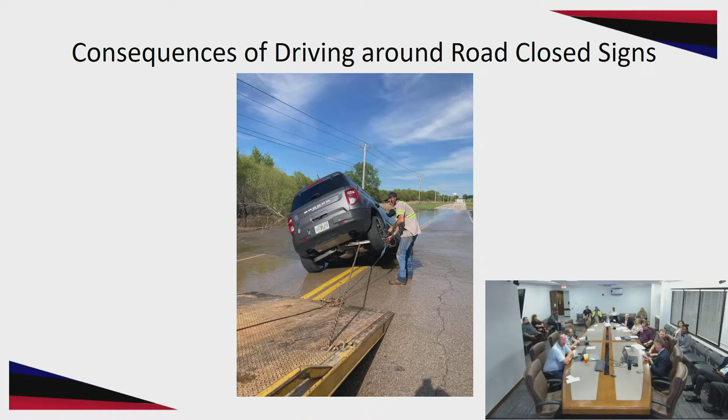The average rainfall for the month of April was 3.64 inches over 30 years. This year in April, we had 14.06 inches, almost 5 times that amount of rain. You can imagine what that does.

We all know it's been kind of a wet season, so things were already in a rough situation. The main storm event we were really watching was April 19th through April 30th. That's when we saw the most flooding and the most damage being done.

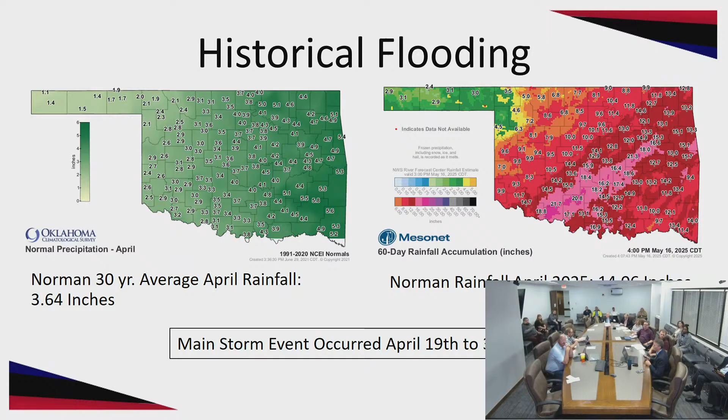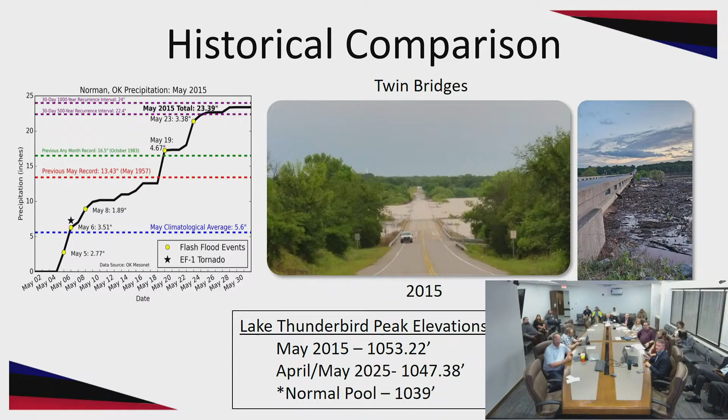Scott, is that debris from the tree field just to the north of the bridge? That is north of the bridge, so that would have been stuff washing down the little river through that area and collecting along the bridge because it couldn't flow under. I'm gonna say if I have a boat on Thunderbird, I may not want it out right now. There's logs floating under the water.

You mentioned about discharging. The city of Norman is not in charge of discharging that water. That's correct. The Army Corps of Engineers, and of course the lake is under control of the Bureau of Reclamation, they control all those discharges, so that's not something we have any control over. We do recognize the folks at COMCD, they usually get a hold of Mr. Mattingly and his team and say, hey, you can drink all the water you want out of Lake Thunderbird for free to help get down below that overflow yield. So we turn off the well field and try to drink as much of that Lake Thunderbird water as we can when it's available, just do what we can. Yeah, so we do what we can, we do our part.

Another thing I'd like to mention is that a vehicle can float in 10 inches of water. So if you're driving in 10 inches of water, there's a chance you can float. If there's moving water, you can be washed off the roadway. You didn't just have a Bronco to test it out? We were only about 7 inches, I think, at that point.

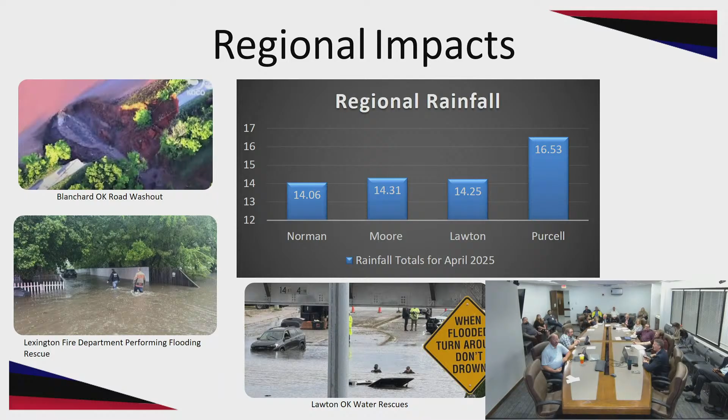I also want to take a moment to recognize the effort it takes when storms hit like this. I'm not going to spend a lot of time here, but we had a lot of different departments involved. City Clerk's office and our action center were inundated with calls and doing their best to keep up. I think there were extra people answering phones to get things where they needed to be to help our citizens. Fire and police, you can see in the photo, were both there on location taking care of our citizens, helping us watch for places where road closures needed to occur and watching out for public safety. Of course, our emergency management group was working hard this entire time.

Public Works were out there looking at road closures and items that were happening - were roads safe, could we reopen them. Utilities had line breaks, and I know they probably had some excess water coming into the water reclamation facility, which meant they had to do some extra operations to make that work. The city manager's office, we had our communications group - Tiffany was amazing in helping get information out to our public repeatedly. And parks, like we showed previously, there were parks that were flooded. They had to make sure they were safe to open back up to people, making sure there wasn't damage occurring and helping us watch the flooding issues.

So when we have these events, it's not one group or a small group - it takes a lot of our resources and a lot of effort. I appreciate each one of these groups and what they did to help during this event.

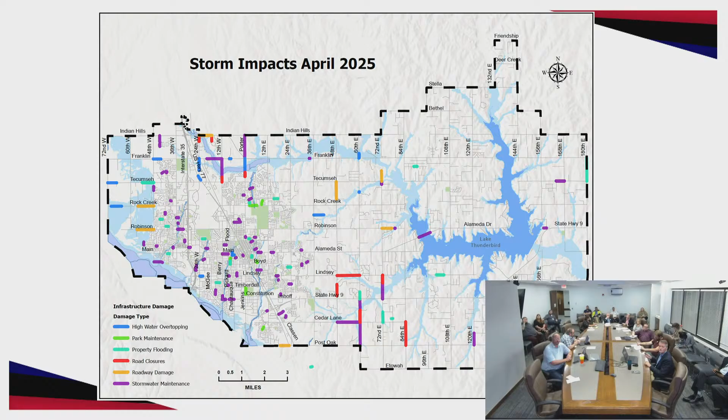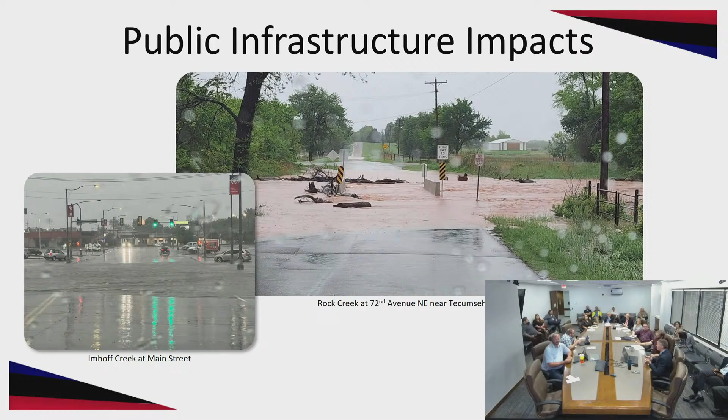When we start looking at what we were impacted by, we had a lot of public infrastructure impacts. That smaller picture is Imhoff Creek at Main Street, which we see go under quite a bit - this isn't something we're unaccustomed to, unfortunately. The second one is Rock Creek at 72nd Avenue in the area around Tecumseh. You can see the bridge is flooded, there's water across it, and you can tell water's moving - this is another place where we had swift water movement. You can see debris all the way across the roadway. These are just a couple of pictures, but this was noticeable all over town. You're gonna see more pictures as we go through this.

So there's a lot of impacts throughout all of Norman.

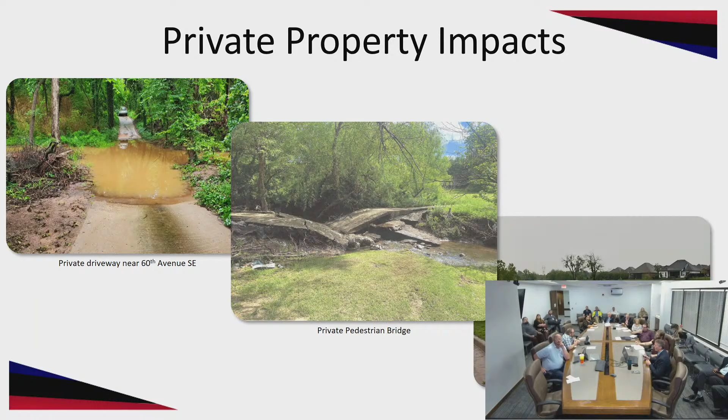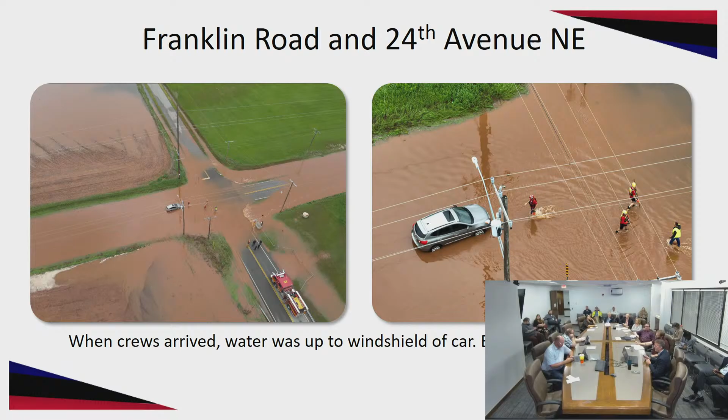10 Mile Flats was heavily impacted - these are just some photos. I live kind of in this area, a little up the hill on Tecumseh, so my first thing I do is drive down to 10 Mile Flats, drive around to Main Street, and check some of those locations. This was basically pretty close to what I saw. You can see that large picture, a very large area inundated. There are still areas prior to this that were inundated and are still continuing to drain, which we're having trouble with.

Just some more photos - I don't know how deep the water is that the car is going through, I can't even see the road. I don't know if I would have wanted to be driving down the middle of that, but they obviously were. And you can see another photo there of just the extent of the rain and flooding we saw in that area.

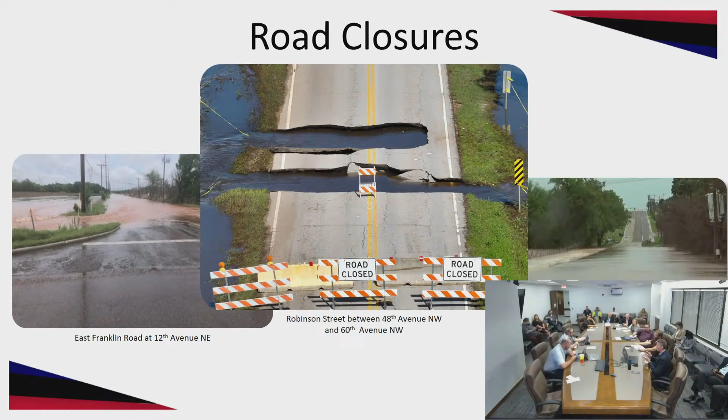I've seen it get 2 feet deep here in the past. I don't know what our actual elevations were here, but it floods for about a quarter mile. So this is another location we always know to check and get road closed signs up, because that's another location where motorists can get stranded.

Structures - we didn't have quite as many structures as we've had in past events. We had 29 reports of personal property flooded or damaged. 24 were related to flooding on the property or washed-out, inaccessible driveways. Most of those you'd expect to be in East Norman, where there's a lot of bar ditches, and those events can wash out driveways and culverts, so there's a lot of damage in that area. Five flooded structures, including garages, sheds, and patios.

The interesting thing is none of the locations where we had reports of flooding were in a floodplain - they were all outside of floodplains. But to build on that, they were all areas that we're aware of. There was nothing new; we didn't really have a new report of an area.

Now, there are areas that were flooded and people that were flooded that may not be reported here, so we may not have all the reporting. A lot of people don't really want to report, or it hasn't made it to us or to the state.

We did check our areas of repetitive loss, meaning structures that have been flooded repeatedly over time and have made claims - that's someplace we want to be more aware of. None of the structures were in those areas. Like I said, they were all in areas that we expected to find flooding.

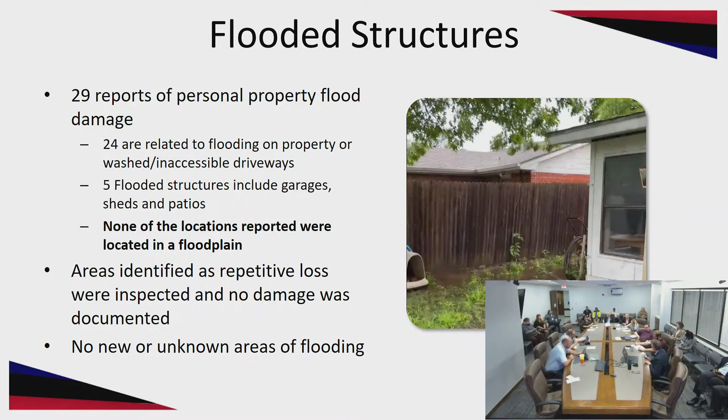How'd the vineyard do? There was no flooding reported in that area. Good job. They made it halfway up Bill's driveway, did it? But that's about it - halfway. Nothing came in the house.

In 2015, my standard line was, somebody would call and say, 'We're flooded.' My immediate response was, 'I'm so sorry - how much water got into your living room?' 'Well, none.' 'Did it come in the hallway?' 'No.' 'Did it get in your garage?' 'No.' 'So you have ponding water in your yard.' Because we were having so many flooding complaints, we had to start breaking it down by whether you're personally impacted with your personal property or just your yard.

So some of the reasons why we're having flooding problems in Norman - I think that bears some brief discussion. In a lot of areas, especially in core Norman, it's a lack of infrastructure, or it's undersized.

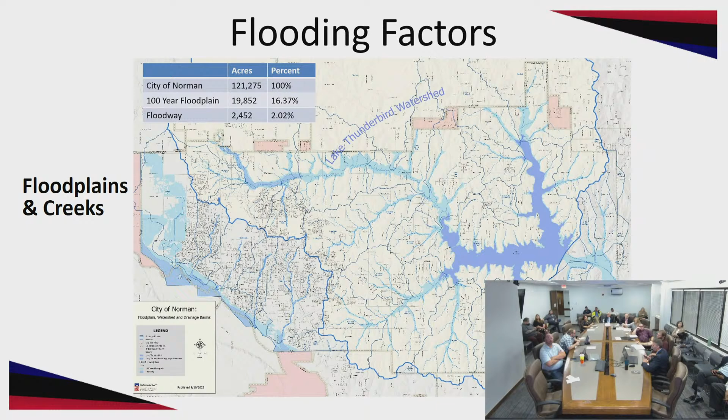I do want to point out that since the 2015 floods, we've done work that's actually come through and helped with flooding issues in Norman. So we're not sitting still, we're always moving forward.

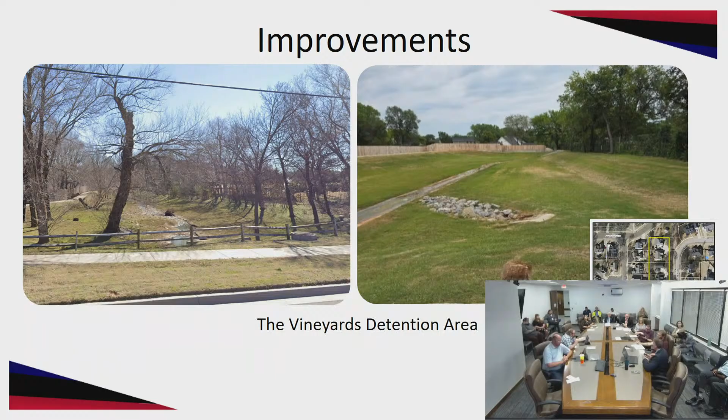This area was done because there were homes in the area that were repetitive loss homes, so it was made a high priority to be able to get those out of that repetitive loss category.

Main Street Bridge over Brookhaven Creek. This is the bridge that we started work on a Monday or Tuesday, and then Tuesday night, the bridge collapsed because of the rain event that we had that night. So it was very lucky that we were already under construction. We didn't have to go get a firm, but it completely failed.

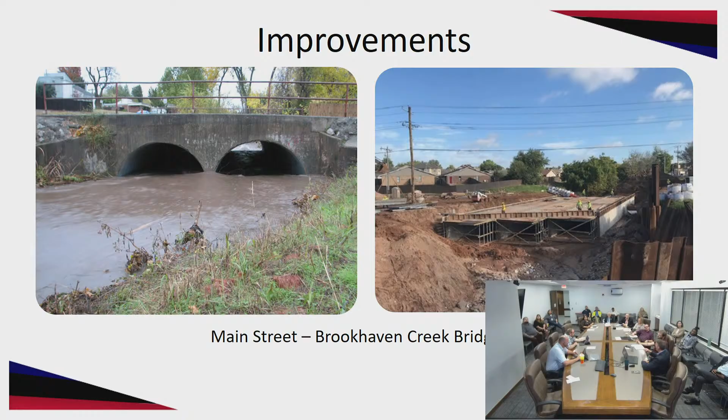Would you say that before the project that Lindsey Street and McGee would have to be closed once or twice or a couple times a year? It would just depend on the year, but yes. As soon as it started raining, somebody mobilized that location to see if we needed to close it.

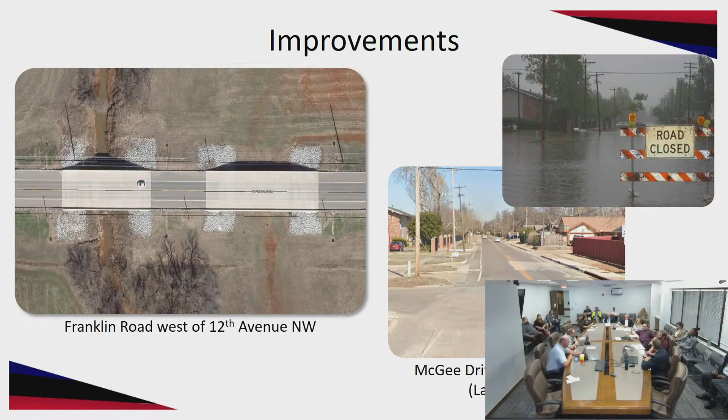Sounds like a surgeon leaving a tool inside. It's about that bad. But other than that, it was one of those times where we were absolutely having a meltdown, and we go, 'Huh, hey, it looks...' But no, we have not had any flooding at this location since. I guarantee it, we go down there every Sunday. And it's wonderful. Yeah, it works really well.

This location is also on that same project. This is the bridge over Imhoff Creek on Lindsay. My favorite bridge in Norman is the one that's got the cool columns. The upper picture is actually what it looked like before. You can see there's not much there. It used to overtop the road. It was a pretty bad situation. That picture in the middle is what the structure underneath looks like.

It's called a Conspan, and that is what is underneath there. The picture on the right is the bridge structure after it's complete, during a very high rain event. You can see how much water was flowing through there, but it opens it up and lets a lot more water flow through. We haven't had any flooding at this location, although it shows that in a 100-year storm, it is possible to get some minor overtopping. We just couldn't get it high enough without causing other problems to completely solve it.

And the word you use is contact? Contech. Contech. That's the brand. Oh, okay, gotcha. And it's called a Conspan, that's their proprietary name. If you've been to the Gathering Place, when you go underneath the land bridges on Riverside Drive, I think it's the same product or a very similar product. So you can use it to build bridge structures very efficiently.

So the picture in the middle, were there multiple of those? They're all connected? The width of the bridge, and they connect together, and they're sealed up together, and then there's concrete around that. Yeah, it was unique, it was the first time we'd used it. It can be costly. A lot of times we can do a box structure cheaper, so we haven't gone to this a lot. But it's something we always have in our pocket if we need to look at it for future designs.

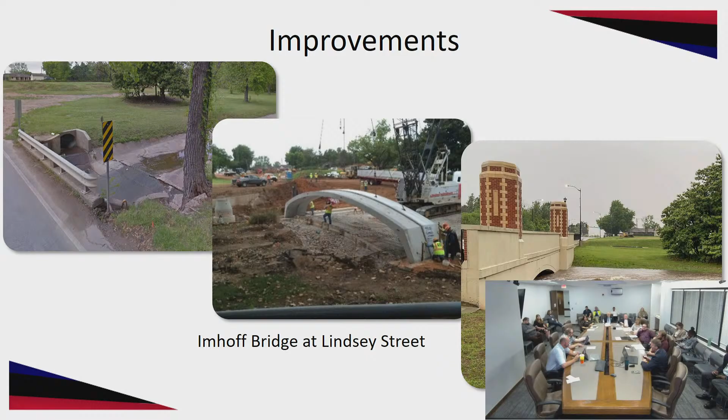And our plan is, we also bought 214 Lahoma, so 2 with the house in the middle now. The plan is to go back in there and do some natural plantings that make it more like a rain garden where they can help soak the water up. This also allows a little bit more water storage area. If we could buy more, we could probably go in there and do some kind of detention in this area if possible. We just don't have enough space to do something like that.

We've also bought several properties. We bought 2 since I've been here on the south side of the Main Street roundabout. And then a little further south, prior to my coming here, 4, 6, 8, I can't remember the number of homes further south that were repetitive loss that we bought that are now clear fields too. Not something we do a lot of, but it's a great way to impact our stormwater. I just want to point out that we bring that to council, and council's assistance in allowing us to do that is making an impact on our flooding in Norman.

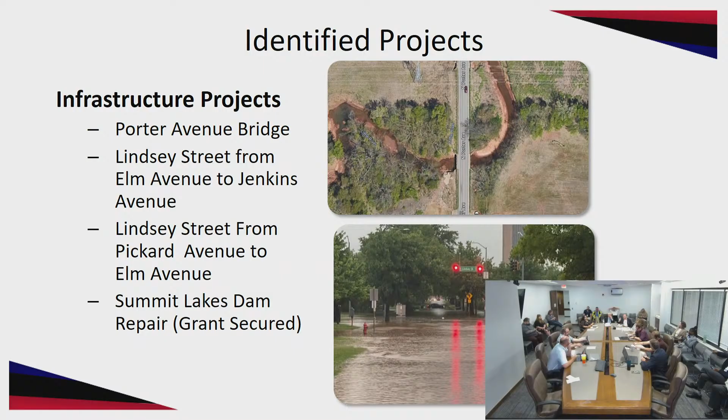When it collapsed, it wound up clogging the creek. They got in there and removed it real quick — we got alerted to that and granted them emergency authorization to clear it so it didn't impede flow. They've already come back, and we issued a floodplain permit yesterday for them to rebuild this pedestrian bridge, because it connects a small community to their pool, which they're not able to access right now.

So again, deferred maintenance becomes a concern. And that's one place your question earlier is, could we take it over? That's hard for me to say we want to take over that liability. Do we need to bring it up to code and then we'll take it over? But obviously we need to assist in that in some way. I don't have the answers to that. I think that's something we're going to put a lot of time and consideration into about how we move forward in that type of scenario.

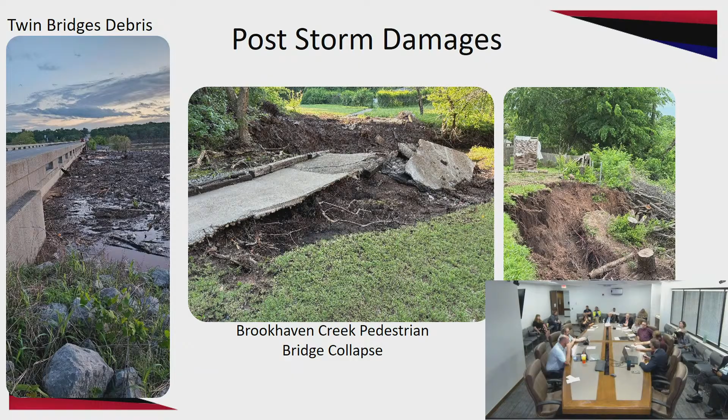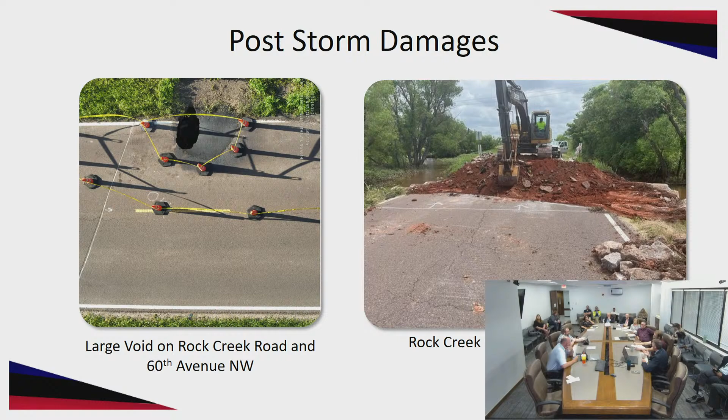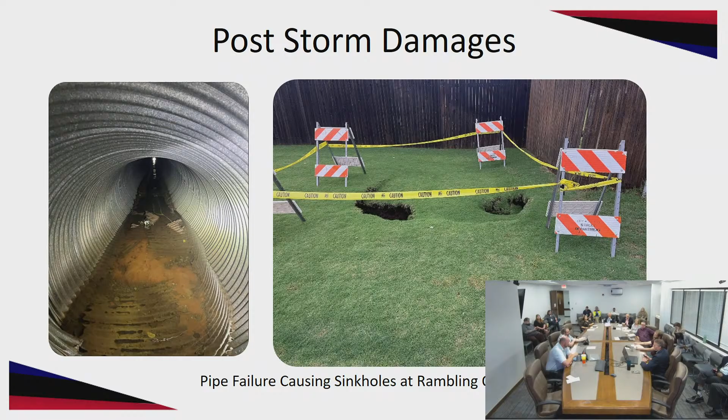We actually got contacted. We've been reaching out asking when can we get pipe. And we were actually told at one point they did not have the steel available to manufacture the pipe for us to be able to do this project.

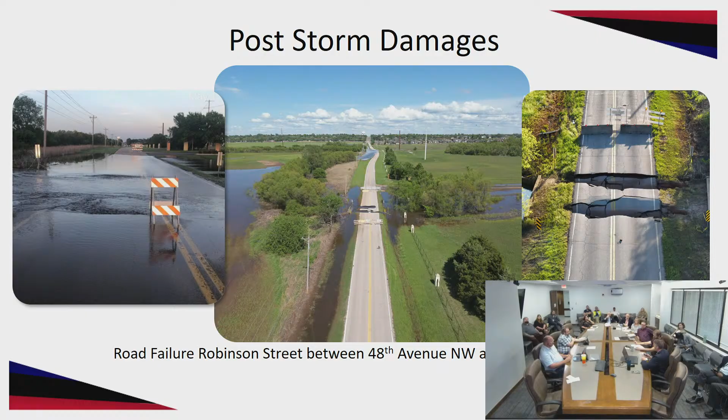So we've started work, we're out there. This is what it looked like at the end of the day yesterday. This is a significant problem. We really can't lay pipe in 4 foot of water, so we've got to get the water to move. We don't know if we need to build a cofferdam and pump, or if we hope that in a few days this drains out. But it looks to me that there's probably some blockages downstream that aren't cleared, that are on private property. So we're monitoring this and we're going to continue to do it.

By the way, in this case we are coming back with corrugated metal pipe, but it is epoxy coated. This is going to be a project where we'll be looking to find a way to get this entire roadway out of the floodplain, and construct structures that can actually transfer the water properly and not have flooding issues in this location. So this is a long-range project, a long-range plan. This is considered a bridge, so this could be a high priority for a second bridge bond if we get that far and if we do a second one.

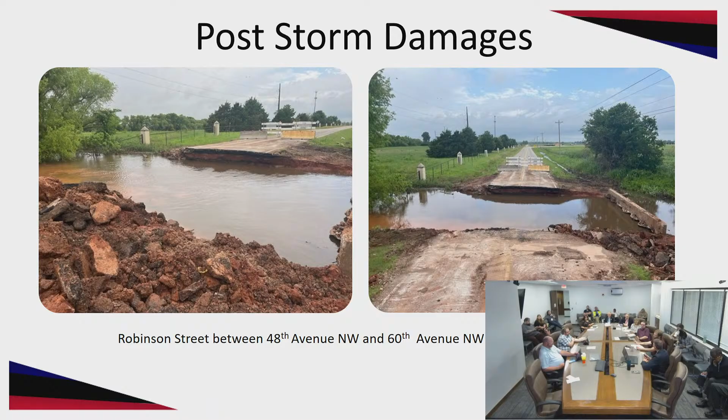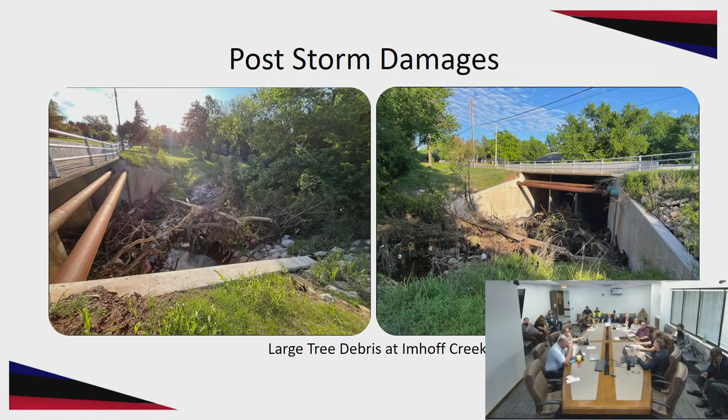This is the bridge over at Imhoff Road, over Imhoff Creek, the one that we just spent several million dollars repairing because of damage and erosion around the structure. This is on the north side where it's coming from Norman, from core Norman. You can see all the debris that built up there. This one is probably one of the worst, but it's also one of the larger channels. This is very typical of what we're dealing with at all of our bridges and crossings right now, just a lot of debris.

And Jason, your team is the team that clears all that? We actually contracted that one because we were worried about more flooding and us having time. We have a great local vendor, but that cost us $6,000 to get that cleared in about 24 hours, just because we were concerned about not wanting that blocked if we got another round of rain. And that also freed up our crews to go deal with the smaller stuff that we're a little bit more able to handle quickly.

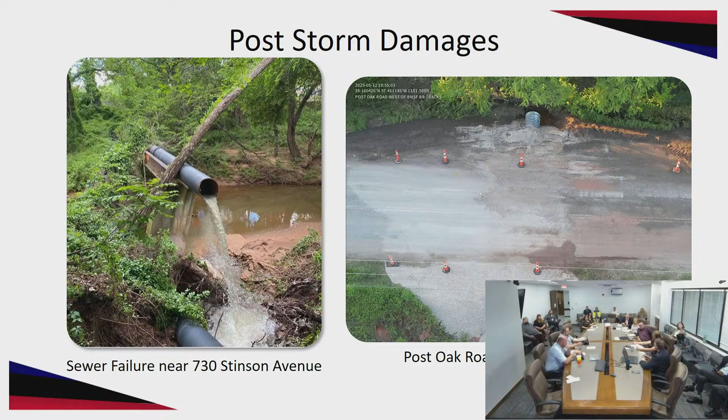I'll go quick here, you can read as well as I can. 41 pothole locations is way low, I think that was a couple of weeks ago. I'm sure it's higher now because we continue to get calls daily of new potholes, caused by the rain events.

1,300 pounds of cold patch, 4 tons of hot mix, 30 tons of gravel, 10 locations where we're trying to get debris removed, 3 pipe washouts, 2 bridges still closed. The bottom one, stormwater damage, like I showed you on Rambling Oaks that's become evident due to this storm - that's 1,600 linear foot of pipe that this storm has shown us is damaged, ranging from 18 to 56 inch pipe. We do not have the funding to go and do these repairs right now. We're looking for those funds and how we can get to those.

I had a question. Like when they were saying there's emergency funds for repairs for homeowners and whatnot, does that include us at all, or?

We have not seen anything that's been posted yet for hazard mitigation for this storm event. We continue to look. I know our fire department and emergency management group are watching that closely, and if it pops up, we're ready to jump. We are watching.

We've also had, in the past, the fire event several years ago, as well as the tornado that went through East Norman. CDBG actually came back after the fact with some disaster relief money, and we were successful. We were able to repair 14 miles of roadway in the end, a little more than that, and we were able to get some of those locations up out of the floodplain when we redid those structures.

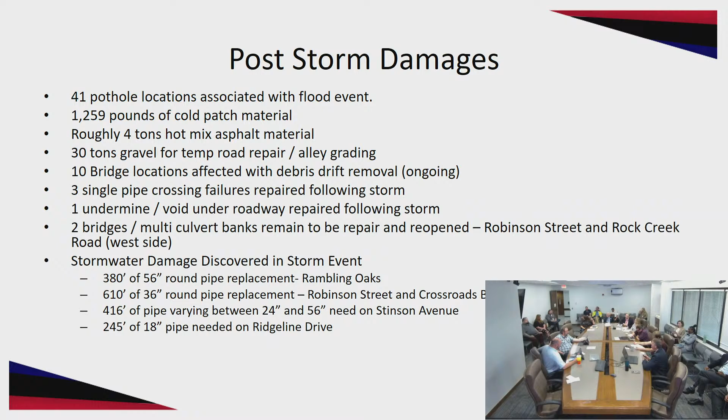So again, stormwater utility fee, can't hammer it home enough. Well, I'm gonna hammer it home some more now.

This is something somebody else put out that we stole for today. These are some of your top communities by size in Oklahoma. If you notice, there are two on this list that don't have a stormwater utility: Norman and Moore. Moore said enough, and now they have a stormwater utility fee, leaving Norman as the only major community in Oklahoma that does not have one. We're also the only municipality that has to get a citizen vote for increase or establishment of new fees.

Obviously, if we had a reliable annual funding amount, we could do more with our maintenance activities that could help alleviate some of these problems. But even with that, large capital would still be needed, like back with the stormwater master plan, it was always a utility and a bond package. That's what we came forward to the voters with the last time we did the vote, which, obviously, was not successful.

Funding is a critical item that we deal with, and it impedes our ability to prepare and recover from these types of storm events. I was gonna say, when we did the utility rate increase for water, we had done some surveys, I want to say.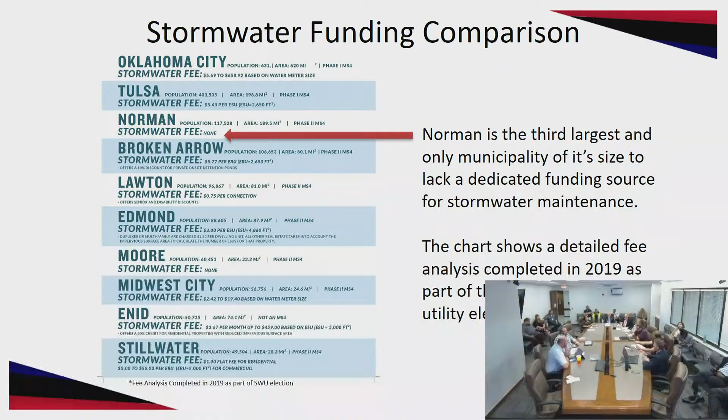Mrs. Verska leads that charge, and we'll be back to you. It'll be done. I think you guys have probably listened to me enough for today, but if you have any other questions or concerns, I'd be happy to answer those, or you can always reach out. We're happy to assist and answer questions.

So when you ponder the timing of today's weather event, all we lived through in April, the information gathered and presented today, and even that request with Mrs. Verska to put together similar survey questions and the process for you. We're also rapidly approaching your annual retreat, and there could be some great strategies on how council decides to proceed with the data provided to you between now and that retreat date. That's great, thank you.

We're gonna keep fixing roads, fixing drainage, cleaning them out. They got some cleaned out today. Thank you. Appreciate it very much, very thorough.